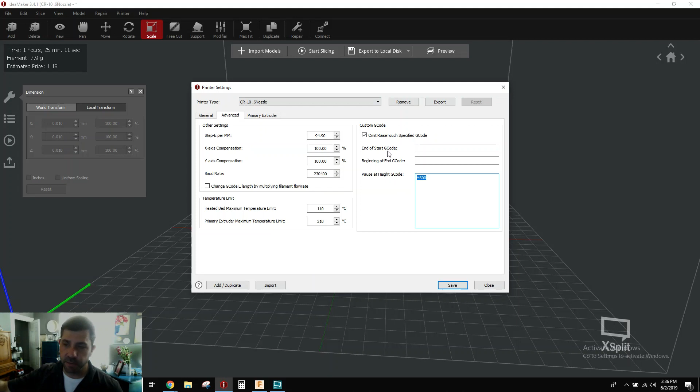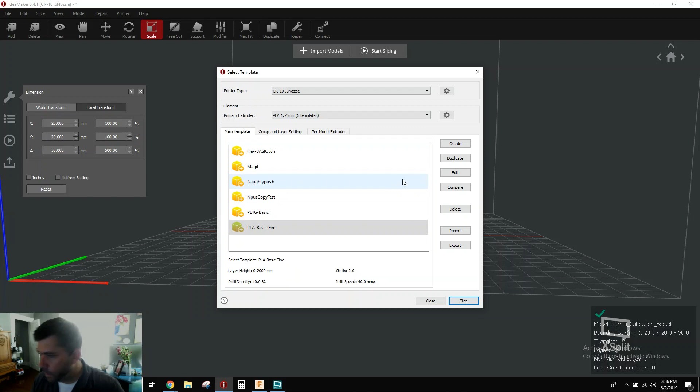Here's how you actually enable it or use it in a slice. Save that. I've got just this little test cube in here. It's 50 millimeters tall. I'm going to throw in a pause at 25 millimeters. So you're going to start slice. Pick whatever profile you want. Doesn't matter, whatever you typically print with. Go to edit, go to advanced, go to the other tab, and right here in this top right corner is where you have the pause at height section.

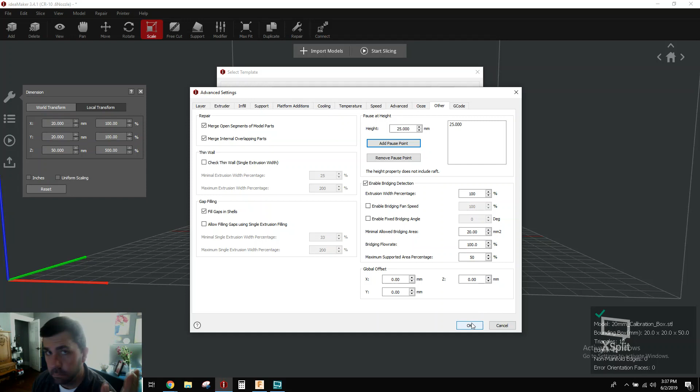And so it's very simple. You're not doing it by layer, you're doing it by actual measurement height. So if you know your model's 50 millimeters, and I'm going to do right in the middle, I'm going to do 25, add pause point, you're done, that's it. Hit OK, save and close, slice. Now, I'm always a big fan of checking the preview on everything, so I always like to make sure that stuff is in the preview the way I expect it.

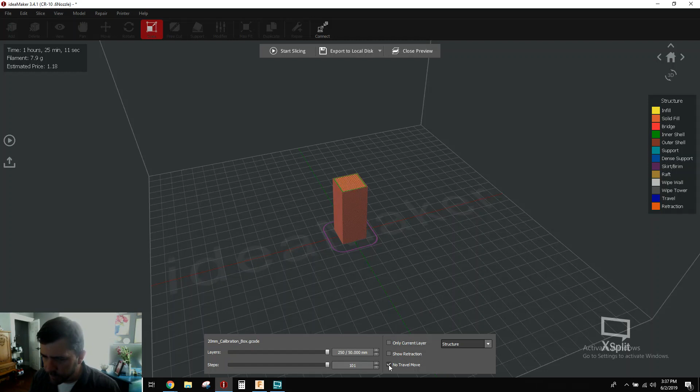And so there's a little bit of a weird bug, I think, in Ideamaker, or maybe it's not a bug, but just intentionally left out for some reason. But if we untick this no travel move so that we see the travel moves, our blue lines in here are the travel moves of the nozzle. So if we go down to the very first layer, right when this thing starts, you can see that from your home position we have a travel move coming out to start the print.

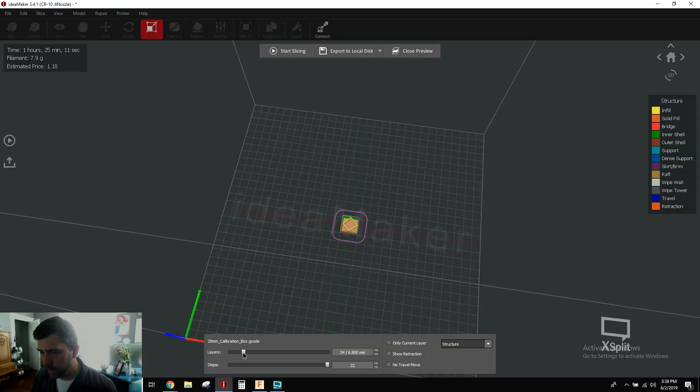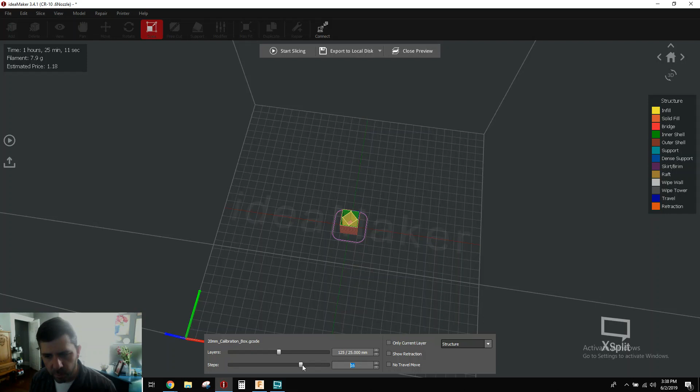So what I would have expected to see at 25 millimeters was an exit line, which I do not. So either at the end of layer 124 or at the beginning of layer 125, I would have expected to see that travel move, and I do not. And so I was a little weirded out that this was a bug. So to verify what was happening, I went over to G-code analyzer and I threw in the G-code after I exported it.

The important thing here was that I had an ingress and an egress line, so I'm pretty confident that the M600 is going to work. And actually my friend Chris did it a bunch of times already and verified it works, so I know it's going to work. So there you go. Pausing at height in Ideamaker just got a lot easier.